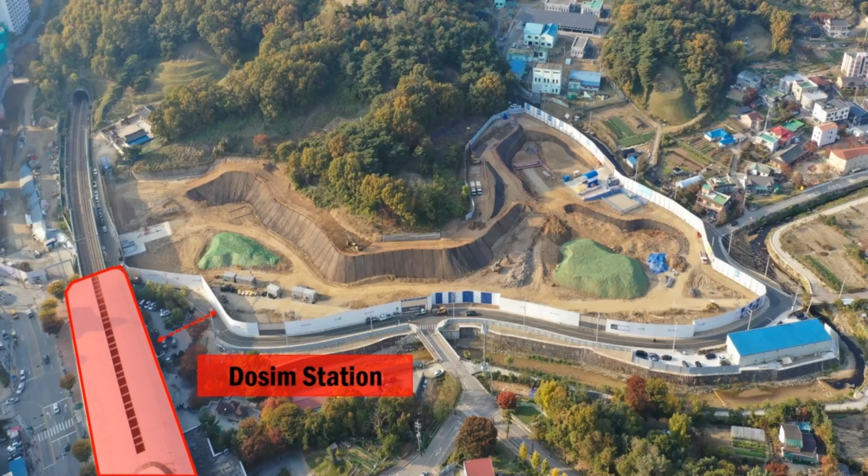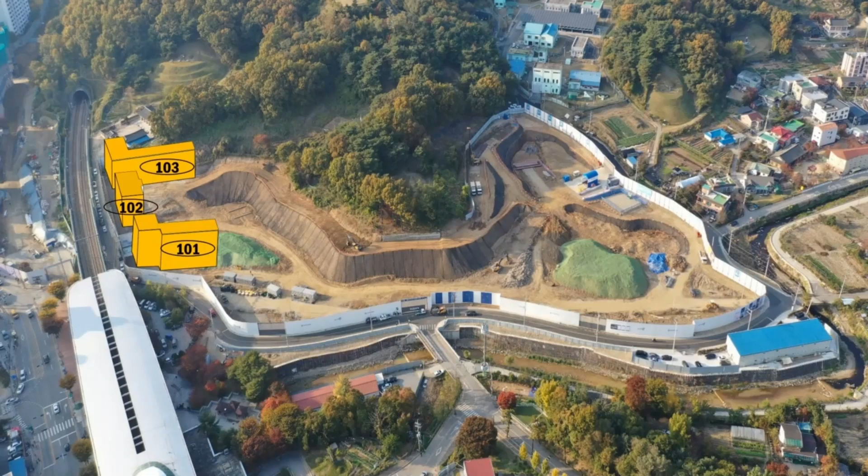What is the most noticeable point when you look at the site image? As you see, the construction work is carried out adjacent to the Dosim Station. In particular, 101dong, 102dong, and 103dong, which are scheduled to be constructed in areas near the railway, are included in the railway protection zone. In other words, the tower crane required for the construction of Building 101 to Building 103 will be located in the railway protection zone.

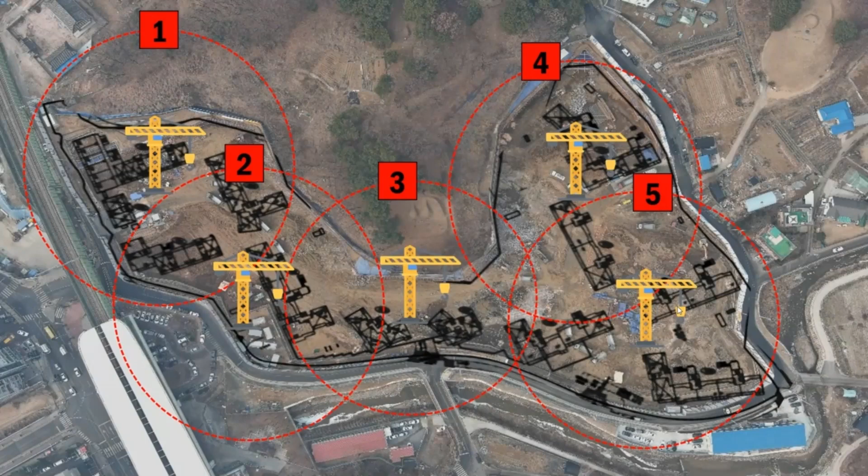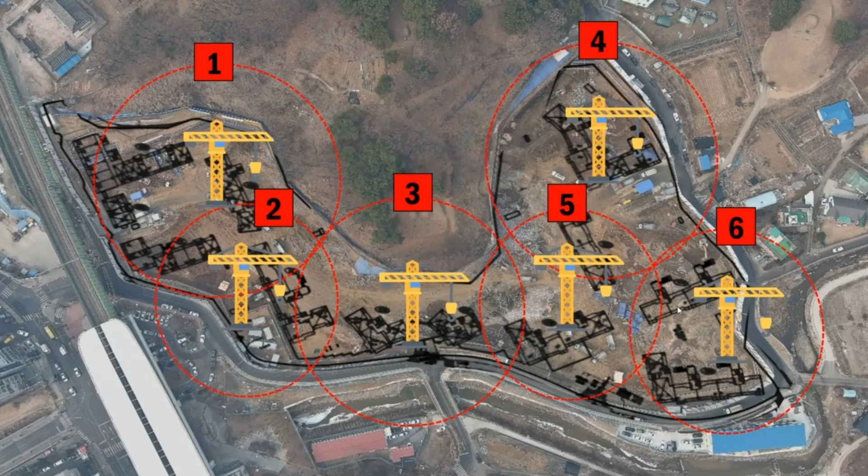The railway protection zone is an area within 30 meters of the railway boundary line. The fact that the tower crane is located in the railway protection zone means that there is a possibility that the working radius of the tower crane will cause a safety accident. Therefore, approval was obtained for railway protection zone activities, and finally 6 tower cranes were approved, adding Unit 2 to the 5 tower cranes that already existed.

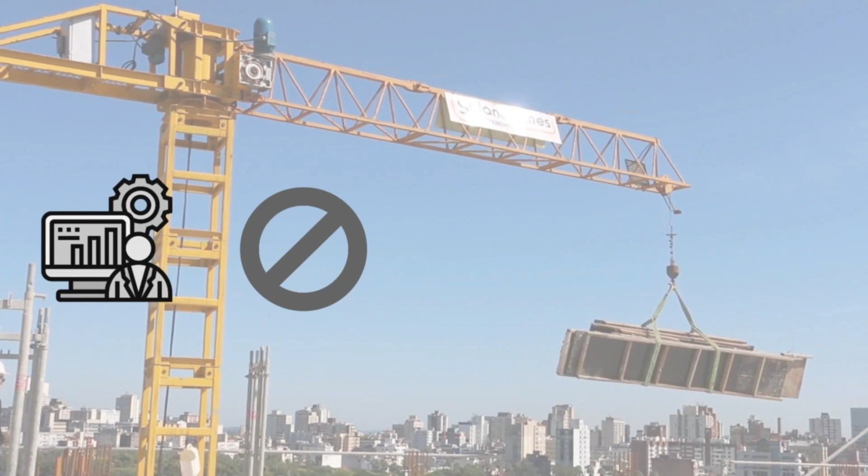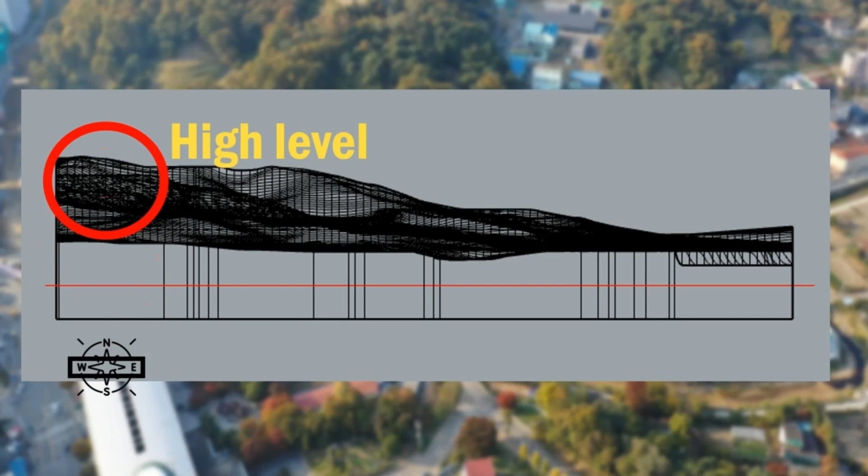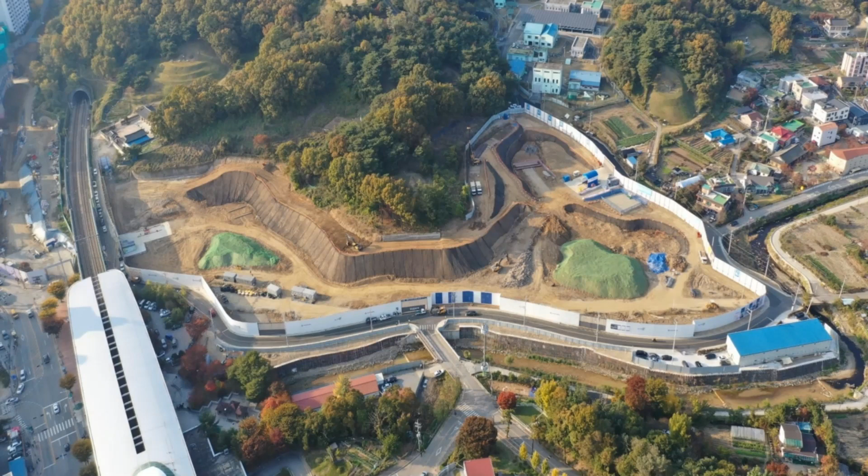If you look in the north to south direction, you can see that the terrain gets higher as you go up to the north. The conclusion that we can draw from these two data is that the topography near Gyeomdaesan Mountain of our site is the highest, and the further away from it, the lower it gets. By considering these geographical differences, safe and effective construction should be carried out.

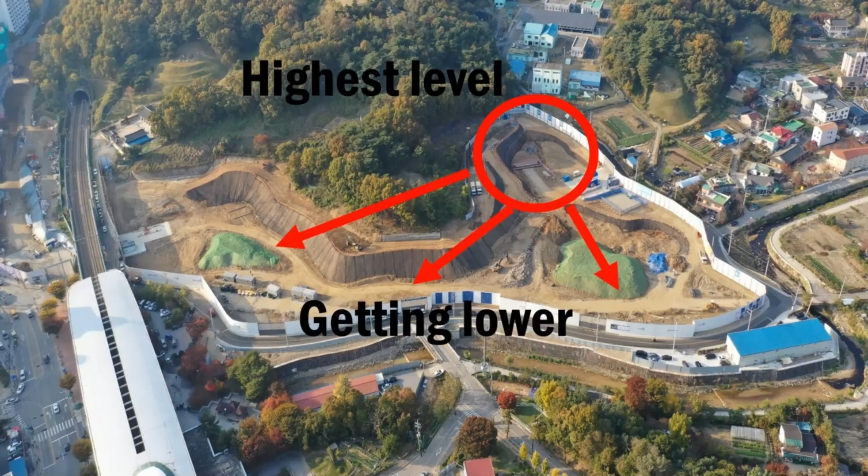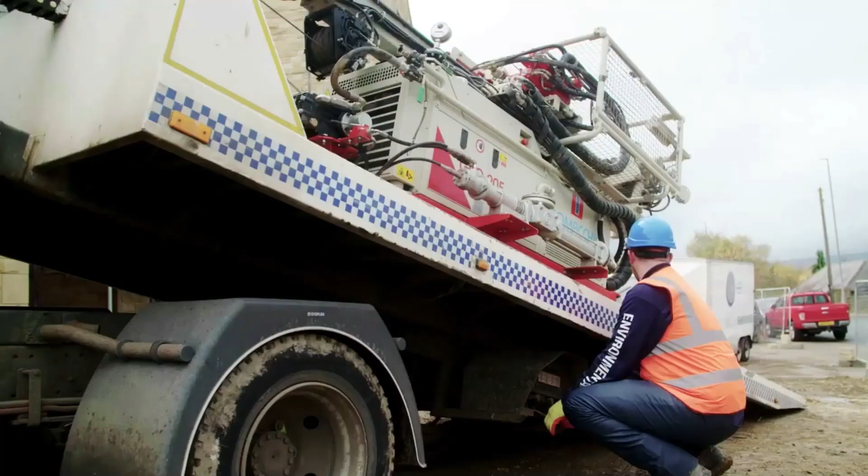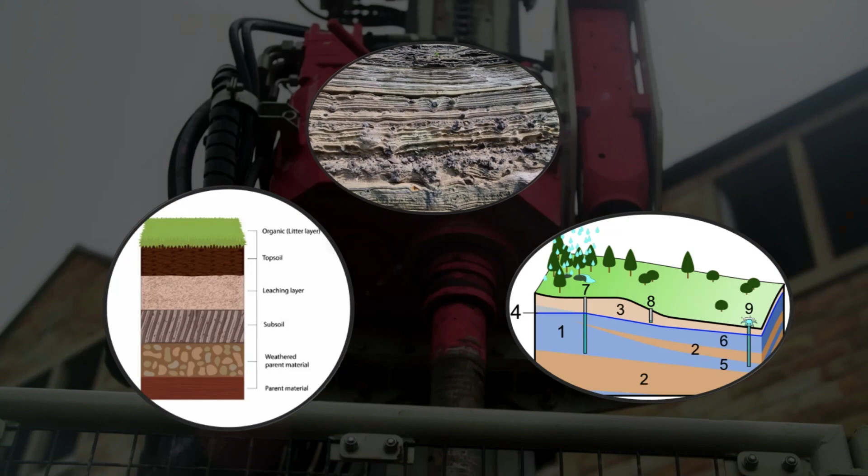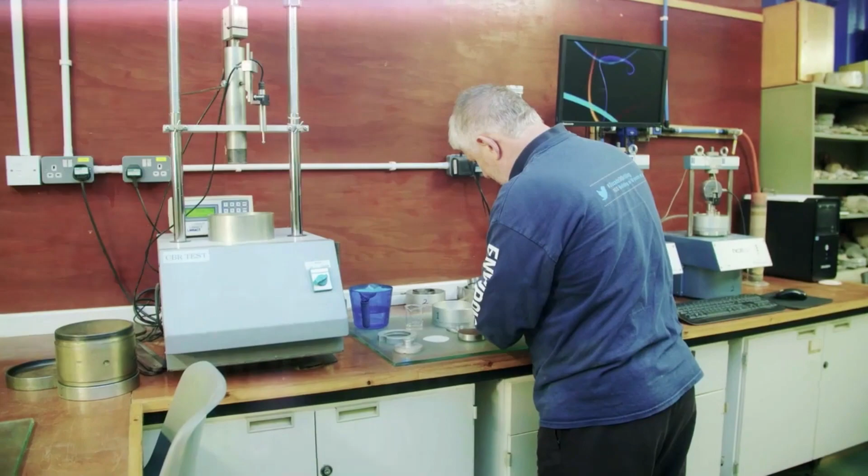If the foundation is unstable, a tilted building can be made, which is very dangerous. So, in order to create a stable foundation, ground research is an important factor in the construction process because it is necessary to check things before the construction. Then, what are the results of the ground survey on the construction site of the River Point apartment in Seoul? Let's look at the distribution of rocks shown by the ground survey.

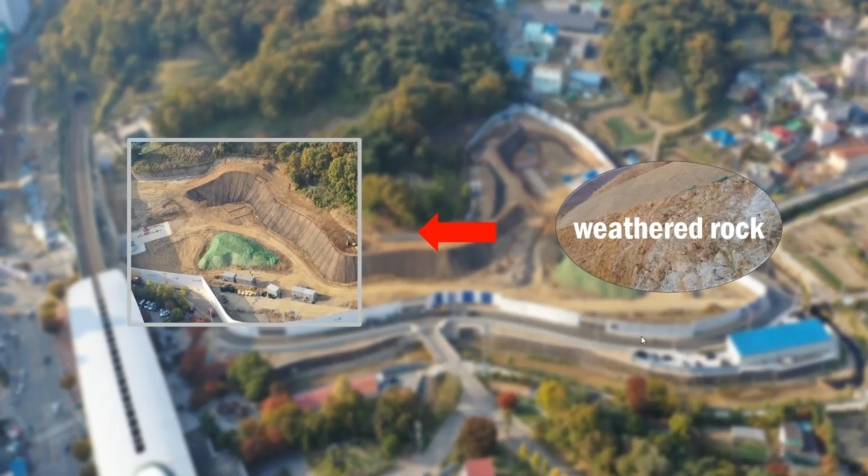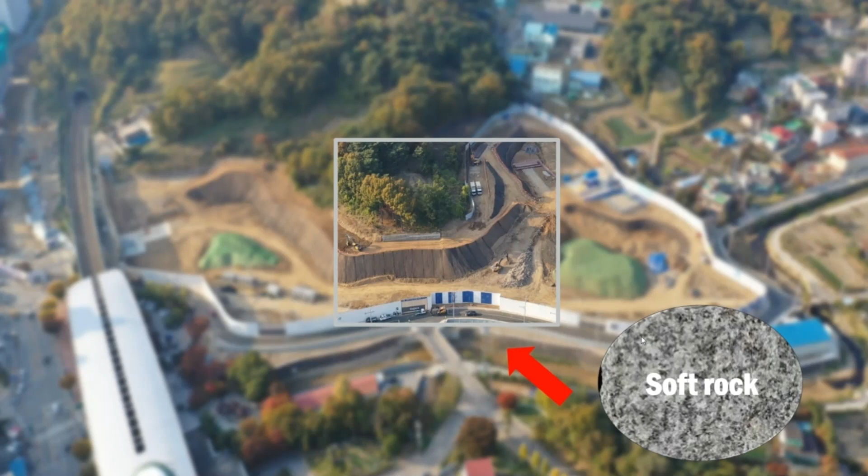Weathered rocks mainly existed on the left side of the site, that is, where buildings 102 to 104 were to be built. The soft rock mainly existed in the center of the site, where buildings 105 to 107 were to be built. And two types, hard rock and soft rock, existed on the right side of the site, where buildings 108 to 112 were to be built.

Next, the amount of rock that needed to be dug out during construction. The largest proportion, with 55% of the total amount to be dug, was soil. 41% was hard rock and soft rock, and the weathered rock took up 4%. And this is the total table. In general, in order to make a building safe, you might think that the foundation, which is the basis of the building, must be deeply embedded so that the ground can endure the load of the building. As you can see from the table, our site has a lot of rocks. So, how can we solve this problem?

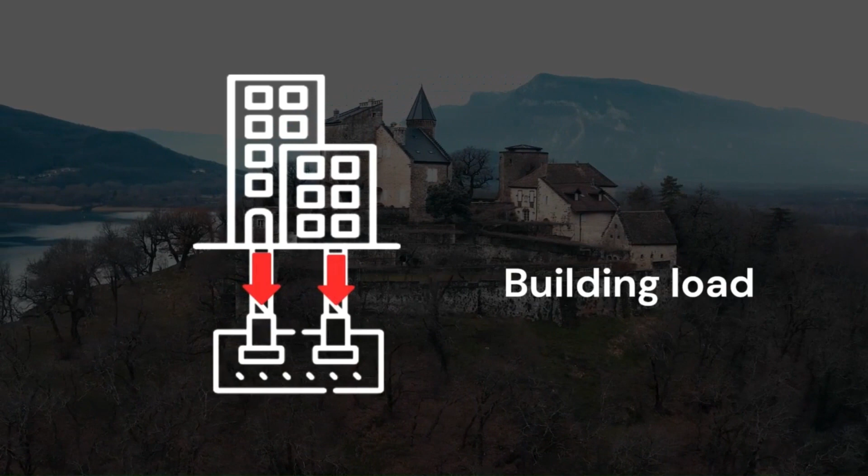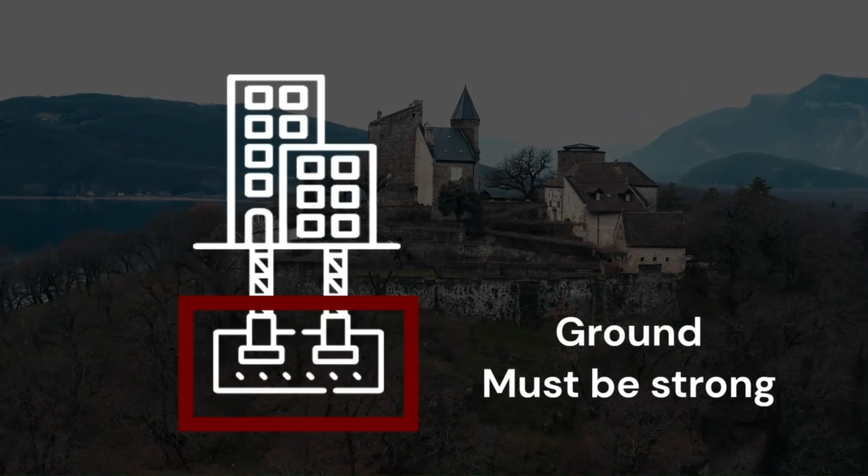What we need to look at here is the bearing capacity of the soil. The bearing capacity of the soil is the stress on the bottom of the foundation when you support the upper load. Briefly, it's the force that the ground holds. For a stable foundation, the value of the bearing capacity must be high and the strength of the ground must be strong. To do so, we need to improve the fragile part of the ground and analyze geological factors to find out which part of the ground is fragile.

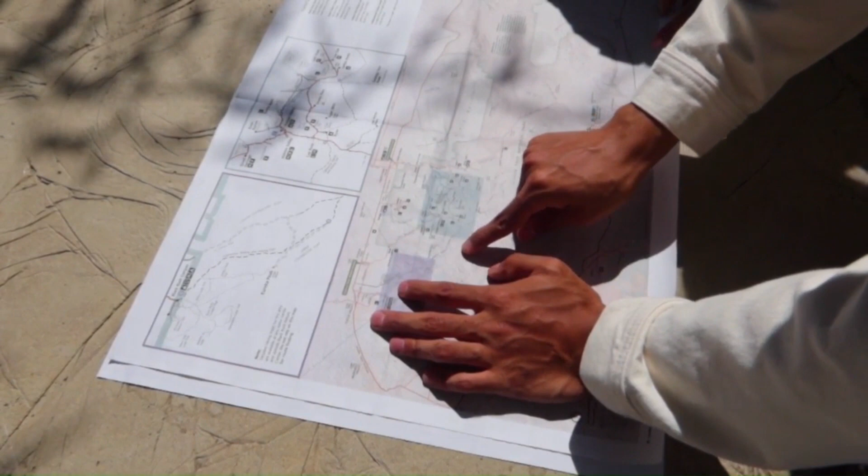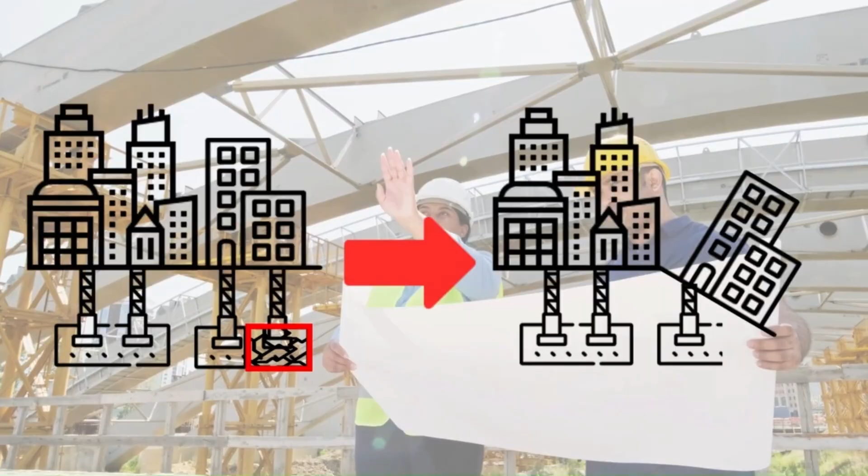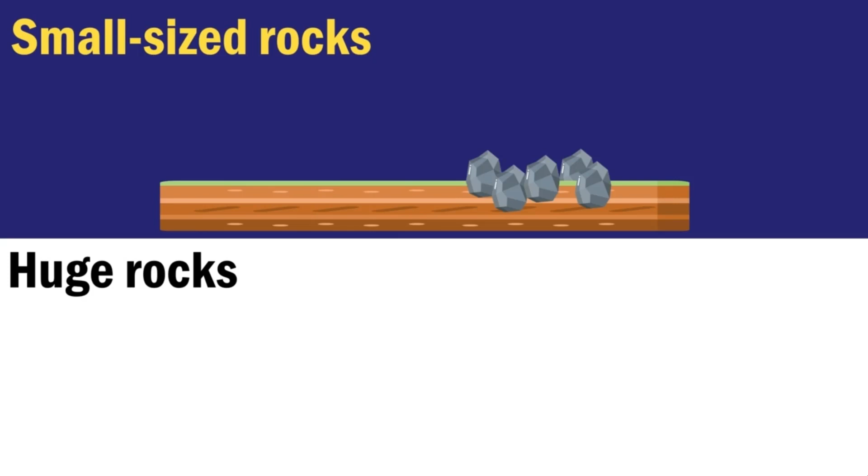The foundation plate must be placed on the ground to begin the construction, because if there is weakness in any part, the foundation plate will tilt or sink. The intensity is about 30 to 50 tons. Among the rocks found during the ground survey, the ground where several small-sized rocks are distributed is considered to be weak, so it will be dug out through blasting.

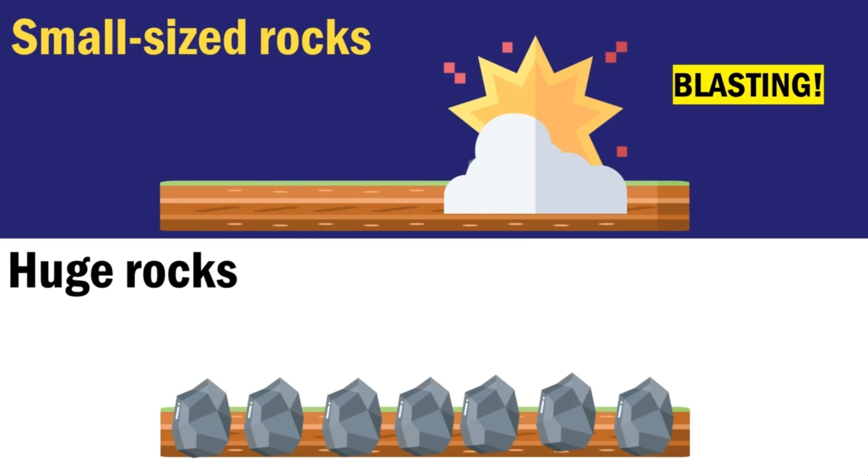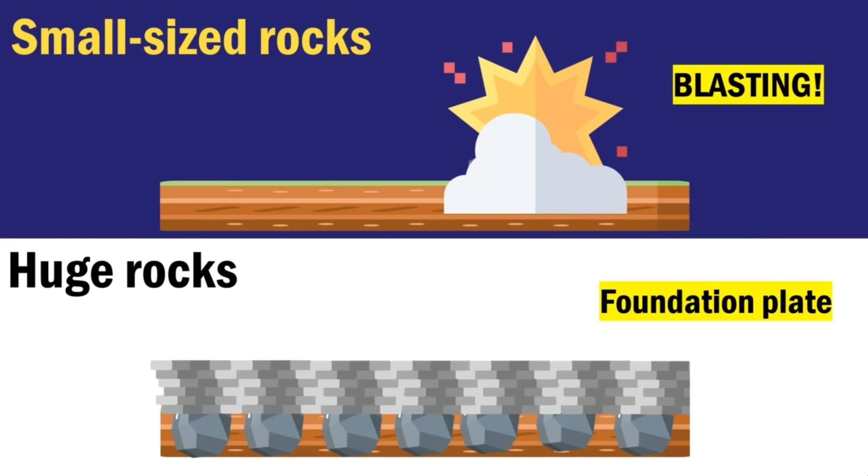On the contrary, the ground formed of huge rocks will be used as the base of the foundation plate. It's because it is not easy to dig out the huge rock, and because of its large bearing capacity, the value is high enough to proceed with the construction process. As a result, the stability concern that the foundation is difficult to penetrate deeply due to the huge rock could be resolved by the concept of having a large bearing capacity because it is a rock.

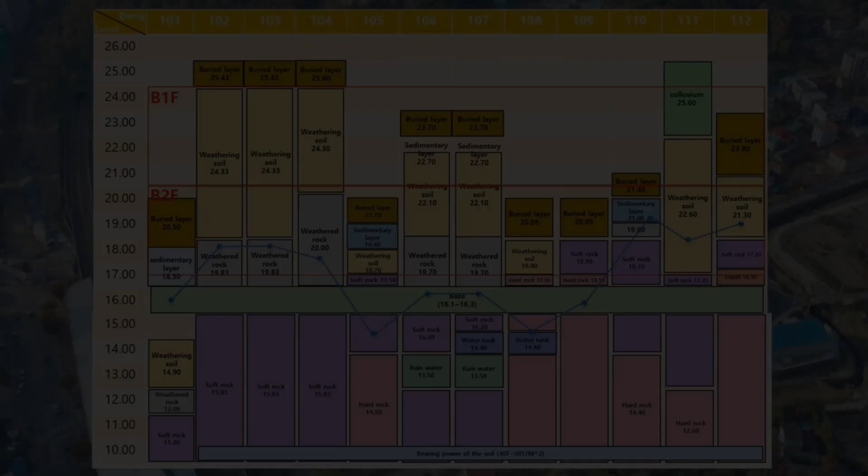Let's go back to the previous data. These values in blue can be determined by the ground survey. Groundwater is water in which rainwater or part of snow penetrates into the ground and fills the gap between strata or rocks made of sand and gravel. As you can see, the level of groundwater varies depending on the ground where each building will be built, from 101 to 112. In particular, building 112 has the highest groundwater level, and it is essential to dig out groundwater to prevent weakening due to groundwater or cracking due to freezing in winter.

Next week, we will review the actual construction process in earnest, and we finish this week.